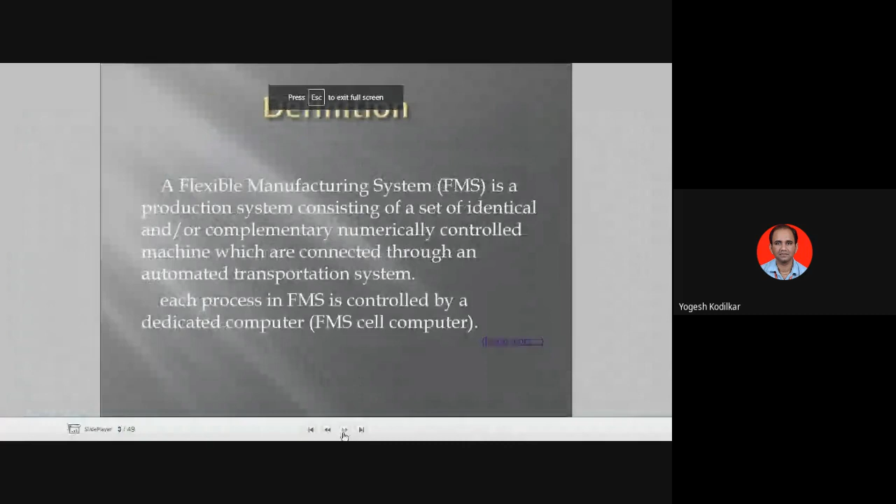That is flexible manufacturing system. FMS काय आपण थोडक्यात बघू. FMS it is a production system, consisting of a set of identical and or complementary numerical control machine. बरोबर, FMS मध्ये काय, इट इज प्रोडक्शन सिस्टीम, बेसिकली काय प्रोडक्शन सिस्टीम आहे ती. त्याच्यात काय काय असतं, सेट ऑफ आयडेंटिकल और कॉम्प्लिमेंटरी न्यूमेरिकल कंट्रोल मशीन.

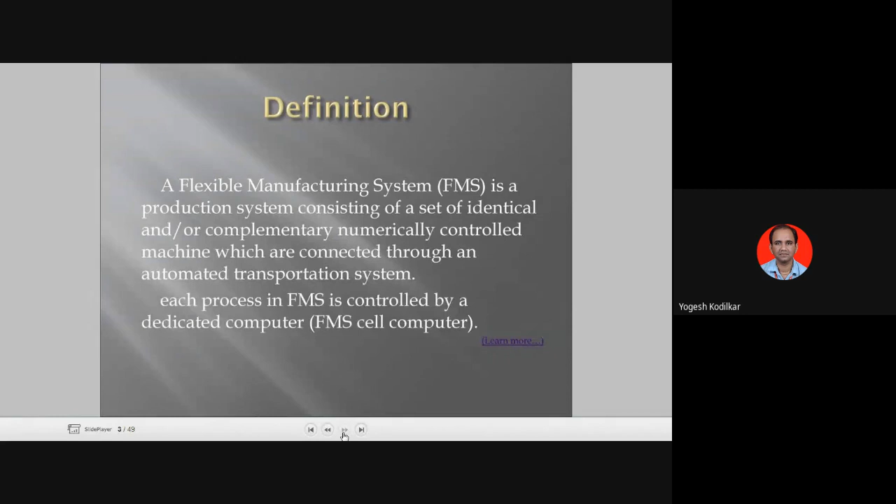NC मशीनच्या बघितलं आपण ना, ज्या नंबर्सनी कंट्रोल होतात. Numbers machines which are controlled by only numbers and letters, दॅट इज न्यूमेरिकल कंट्रोल मशीन. मग न्यूमेरिकल कंट्रोल मशीन्स विच आर कनेक्टेड थ्रू अन ऑटोमेटेड ट्रान्सपोर्टेशन सिस्टीम. आणि ह्या NC मशीन्स काय दे आर कनेक्टेड बाय सम ट्रान्सपोर्टेशन ऑल्सो, म्हणजे एका मशीनवर प्रोसेसिंग झाल्यानंतर that product is transferred to the next workstation, next machine for further processing. So automated transportation system is also there.

Each process in FMS is controlled by a dedicated computer called as FMS cell computer. So that is flexible manufacturing system, it is the production system consisting of a set of identical or complementary numerical control systems. सारख्या सिस्टम असणार आहे, सारख्या NC मशीन्स आहे काही. Not only NC machines, but machines are connected through an automated transportation system also, for transporting from one machine to other machine. ओके. सो दॅट इज युअर FMS सिस्टीम.

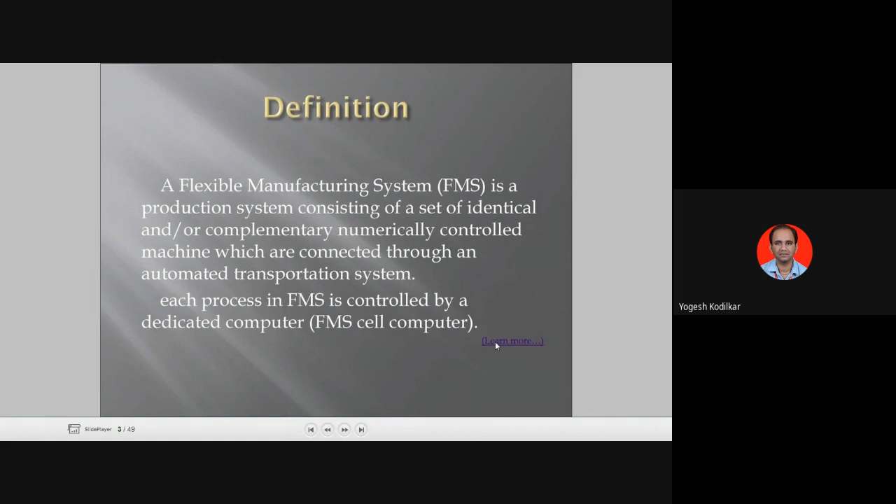बरं. आता हिस्ट्रीमध्ये बघू आपण. हिस्ट्री ऑफ FMS. ॲट द टर्न ऑफ द सेंचुरी FMS डिड नॉट एक्झिस्ट. बरोबर, 20व्या शतकात काय होतं, FMS सिस्टीम नव्हती, 21व्या शतकानंतर सुरू झाली. देर वॉज नॉट अ बिग इनफ नीड फॉर एफिशियन्सी बिकॉज द मार्केट्स वेर नॅशनल अँड देर वॉज नो फॉरेन कॉम्पिटिशन. और मुक्त अर्थव्यवस्था नव्हती तेव्हा 20व्या शतकात.

20व्या शतकात मॅन्युफॅक्चरर्स कुड टेल द कन्झ्युमर्स व्हॉट टू बाय. Henry Ford is quoted as saying, people can order any color of car as long as it is black. This was the thinking of many big manufacturers at the time. After the Second World War, a new era in manufacturing was to come, the discovery of new material and production techniques increased quality and productivity.

This was the thinking of many big manufacturers at the time. After the Second World War, a new era of manufacturing has come. The discovery of new material and production techniques increased quality and productivity. The wars end, open foreign markets and new competition. Now the market focus on consumer and not the manufacturer. बरोबर, कालांतराने काय आलं, दुसऱ्या महायुद्धानंतर हळूहळू कंपनीचा फोकस मार्केटवर नसून दॅट इज गोज ऑन टू द कंझ्युमर. कंझ्युमरला काय पाहिजे त्याची अपेक्षा पूर्ण केली गेली.

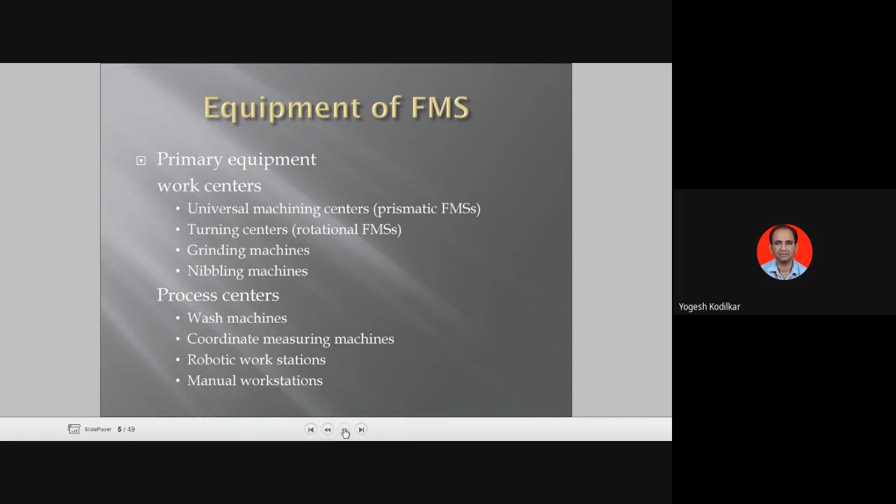FMS primary equipment includes work centers, usually universal machining centers or turning centers like rotational FMS, grinding machines, nibbling machines. These are the work centers for primary equipment. Then process centers include wash machines, coordinate measuring machines, robotic workstations, measuring workstations, or manual workstations. So these are the primary equipment and process centers for the FMS system.

Then there is secondary equipment as well, like support stations such as pallets, fixture load, unload stations, and tool commissioning setting area.

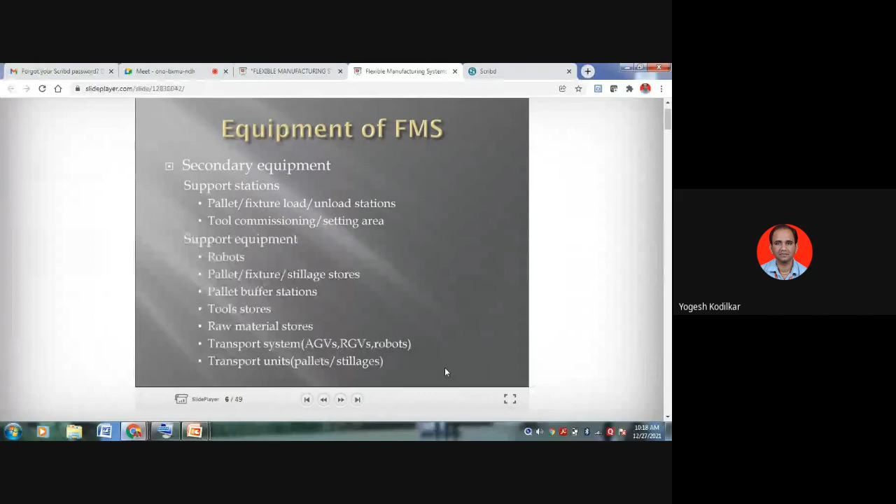Robots, then transport units, pallets and stillages. So these are the different equipment of FMS.

Then these are the applications of FMS, where we can use this FMS system for metal cutting, machining. For metal cutting and machining, we can use the FMS system. In metal forming too, we can use machining, FMS system.

We can use FMS system for assembly, in automobile assembly also we are using this FMS system. Then even joining and welding, arc welding, spot welding, we can also use this FMS system.

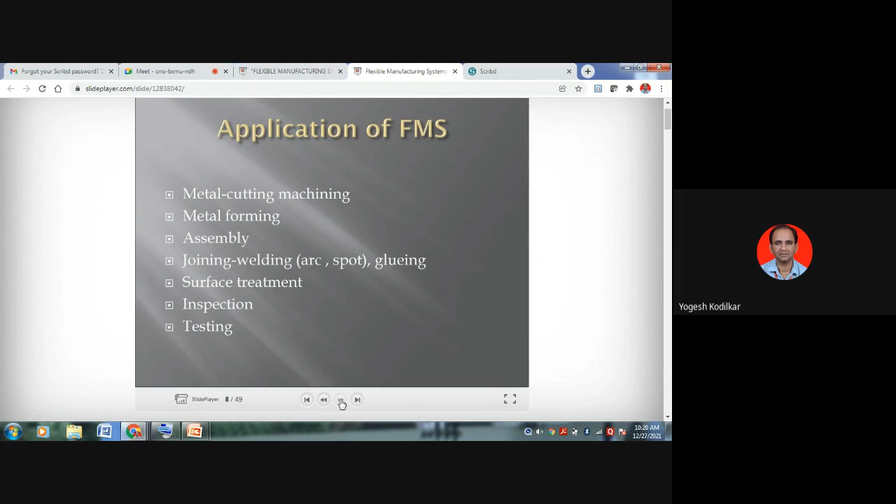Then gluing for pasting, we are also using this FMS system. Then surface treatment, there are some surface treatments like annealing, normalizing, so surface treatment also uses this FMS system. Then inspection for quality checking, we are using this FMS system, or testing, for testing also we are using this FMS system.

Now FMS has different approaches. There are different approaches for FMS, like the capability of producing different parts without major retooling for a number of parts. Without using major retooling, I can go for FMS system.

A measure of how fast the company converts its processes from making an old line of products to produce a new product. From that old line, I need to create something new - I need to take a new approach, like the FMS system.

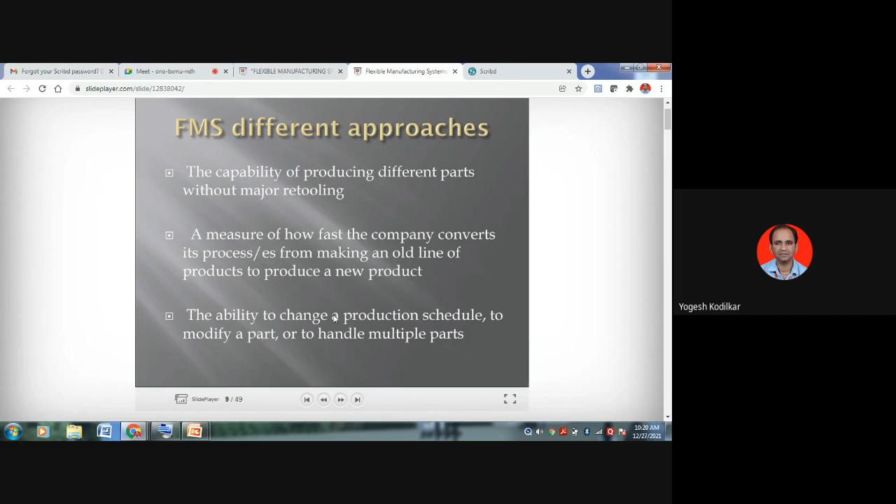The ability to change the production schedule to modify a part or to handle multiple parts, that is FMS system.

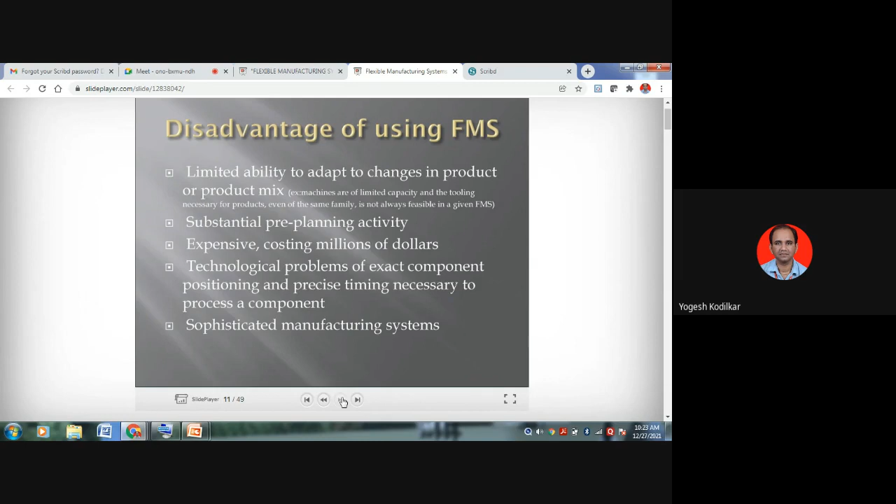Now, what are the developments of the FMS? Several actions must be decided on or before you can have an FMS.

These actions include selecting operations needed to make the product, putting the operations in a logical order, selecting equipment to make the product, arranging the equipment for efficient use, designing special devices to help build the product, developing ways to control product quality, and testing the manufacturing system also.

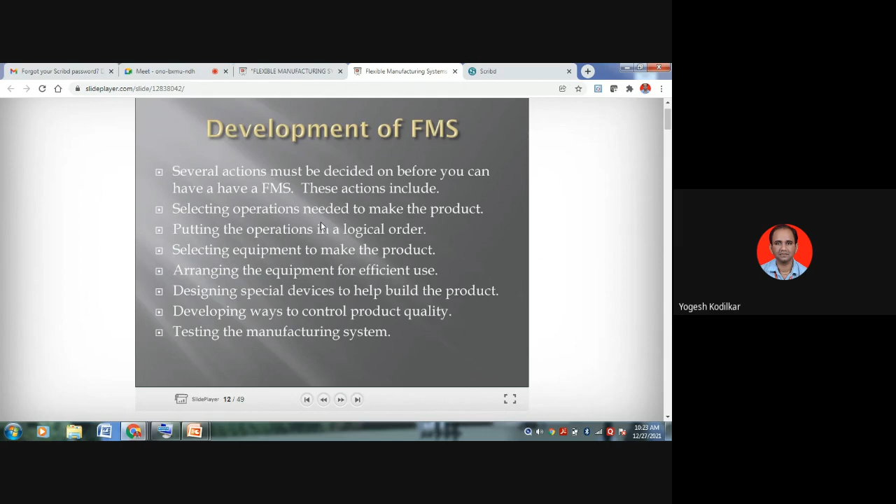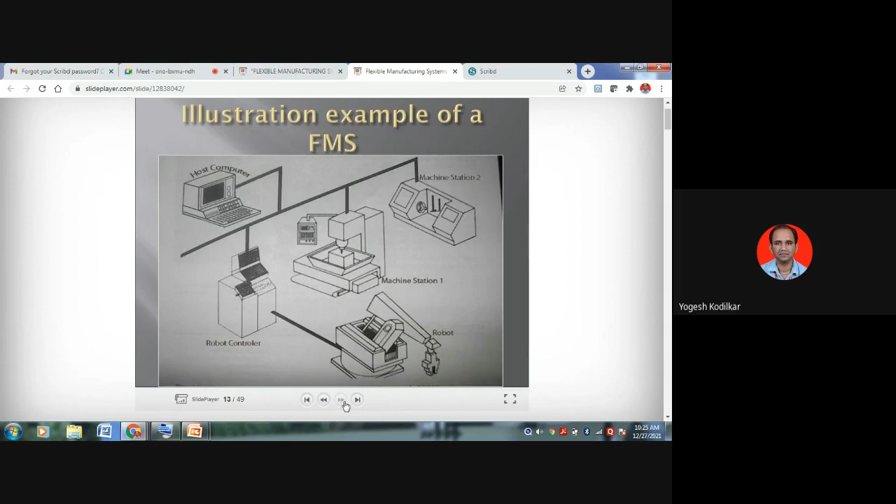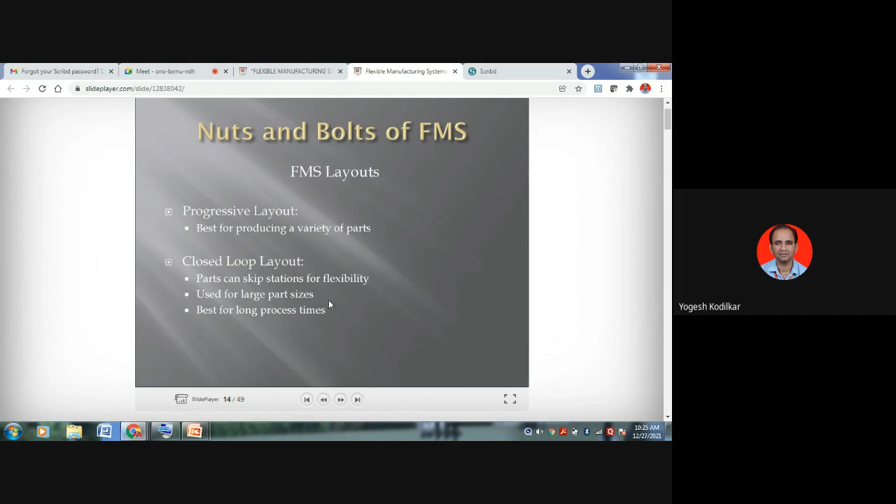So that is your FMS, one simple example of a flexible manufacturing system. Now, FMS layout - there are two types of layout in the FMS system. Nut bolt FMS, suppose progressive layout, best for producing a variety of parts. And closed loop layout - parts can skip stations for flexibility, used for large part size and best for long process times.

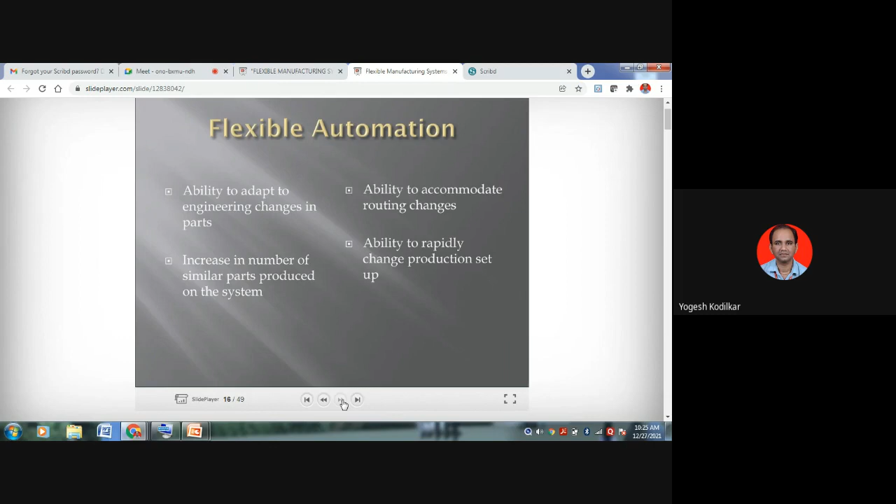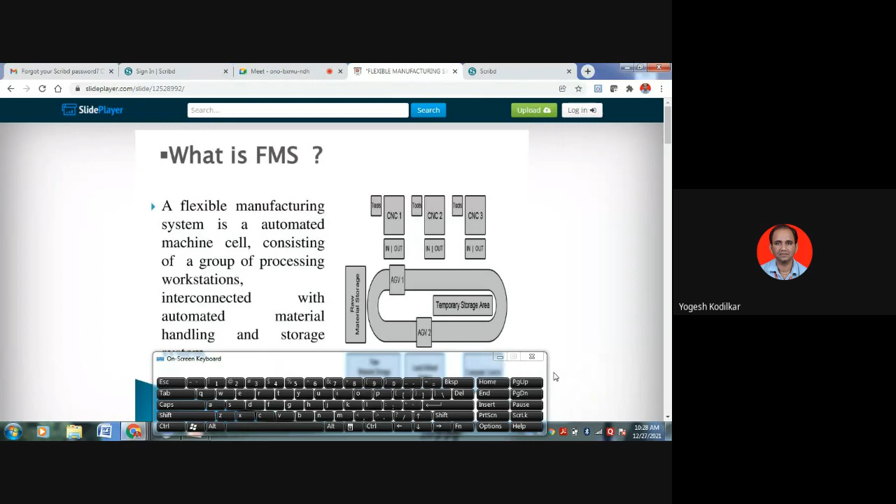So this is the basic introduction and history of FMS.

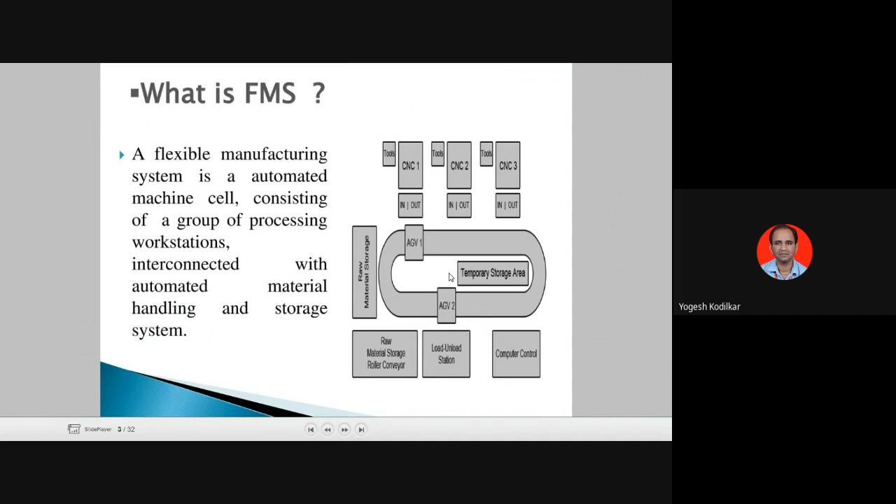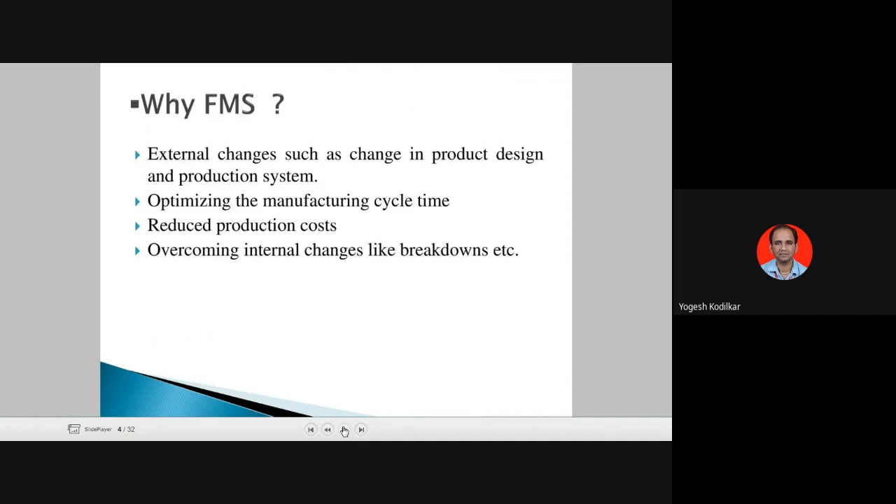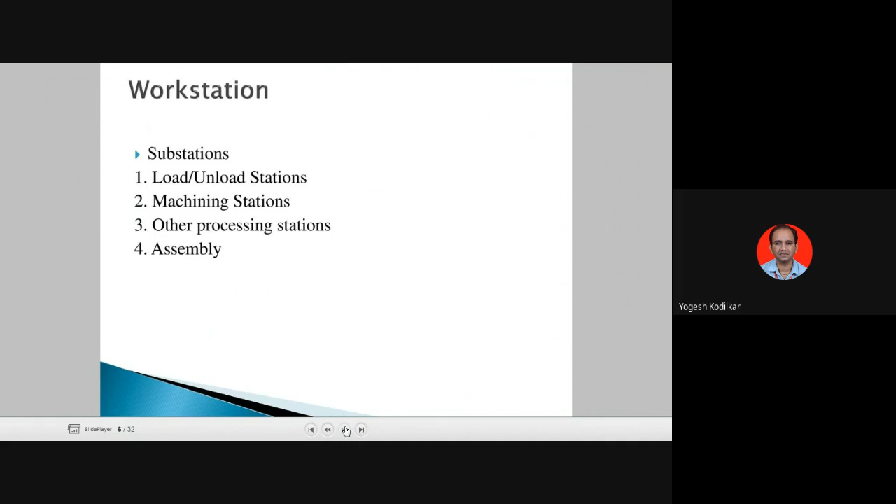These are the basic components of the FMS system: workstations, automated material handling and storage systems, and computer control systems. So these are the three systems of FMS. Now substations: load and unload station, machining station, other processing stations, and assembly.

This is called the AGV, automated guided vehicle. The automated guided vehicle follows an already predefined path. Along this predefined path, the guided vehicles move from one station to another. They are called automated guided vehicles because there is no human intervention—a manless driver, moving along predetermined paths. That is AGV, or automatic guided vehicles.

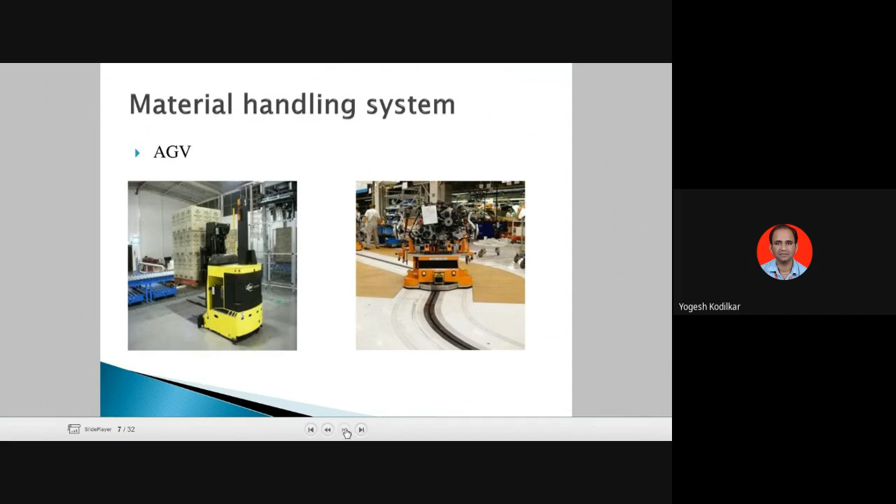Computer control, programmable logic controller.

So this is the Allied Signal's Flexible Manufacturing System. These are the machining centers—machining center 1, 2, 3, 4, 5, 6, 7. These are the number of workstations. Then these automated guided vehicles are also there on this predetermined path. These AGVs are moving, and there is a coordinate measuring machine also there. The CMM machine is for measuring the coordinates. Then there is also a storage station. After processing the component, it is stored at this storage system.

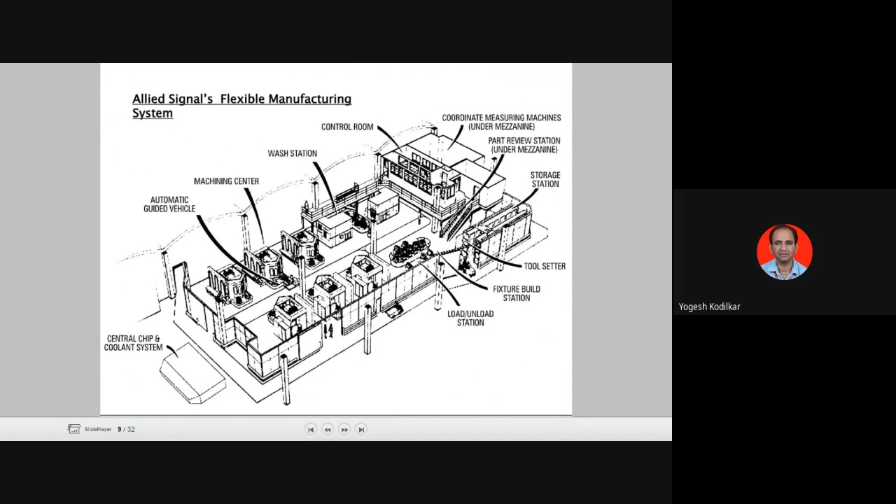So this is your automated system. With the help of this automated guided vehicle, material can transfer from one workstation to another station. So this is your schematic diagram of the flexible manufacturing system. This is one example of an FMS system, flexible manufacturing system.

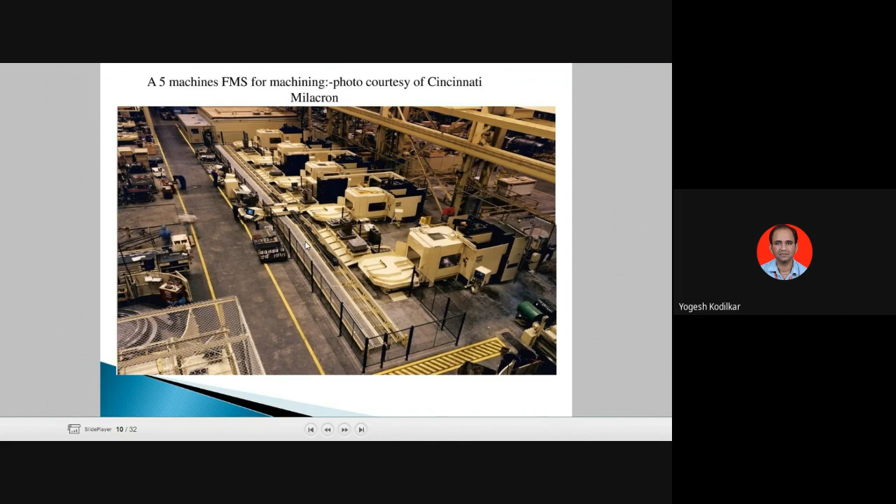Again, a 5-machine FMS for machining, photo courtesy of Cincinnati Milacron. These are machine 1, 2, 3, 4, and 5. The 5 machines are interconnected together with the help of the automated guided vehicle. That is a flexible manufacturing system.

So these are the types of FMS: sequential FMS, random FMS, dedicated FMS, and engineering FMS.

Now, the layout of FMS: progressive or line type, loop type, ladder type, and open field or robot centered. These are the number of progressive layouts. In the progressive layout, there is a progression after machine 1, machine 2, machine 3. Then there is a loop—circular or rectangular loop. This is called a loop layout.

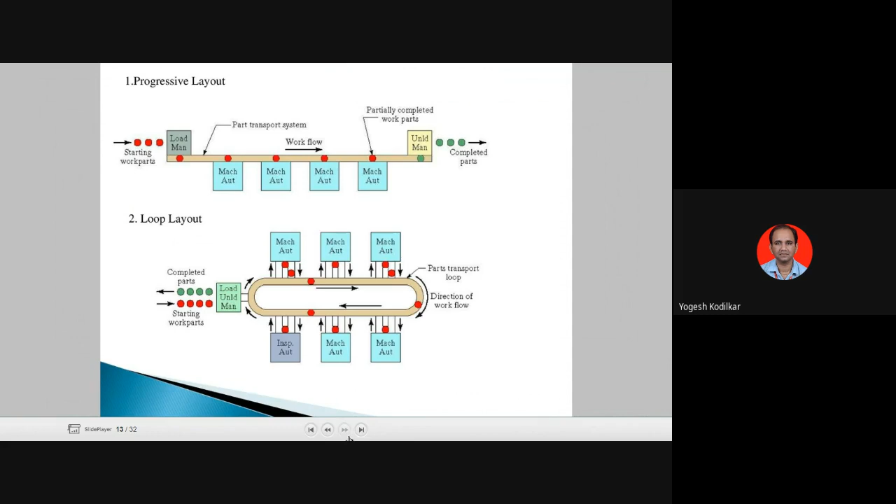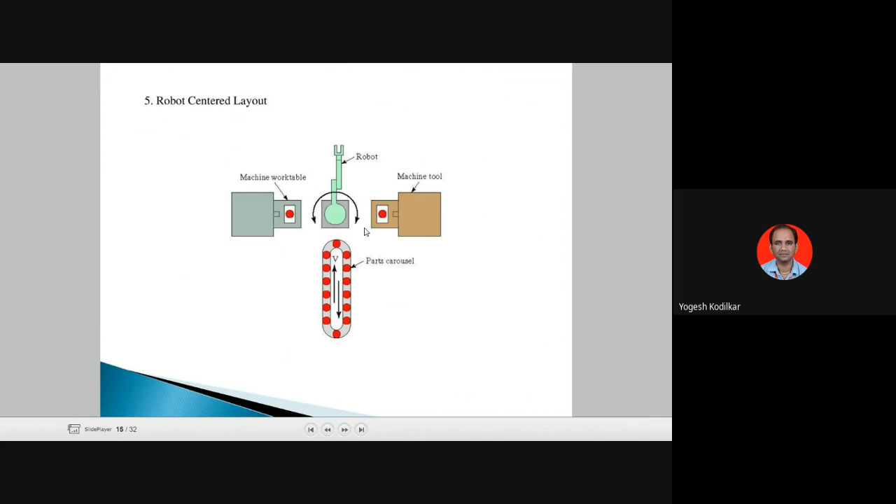Ladder, meaning from first step to second step, there is the ladder type layout, then the open field layout. Then open fields are there for layout. Robot-centered layout, where the robot is at the center. These are the different layouts for the FMS system.

Flexibility in FMS, flexible manufacturing, means the ability to deal with slightly or greatly mixed parts, allowing variation in parts assembly and variations in process sequence. This means that in the flexible manufacturing system, when one machine's component moves to another machine, it is not like the FMS system is working on only one part. The FMS system can handle different flexible parts.

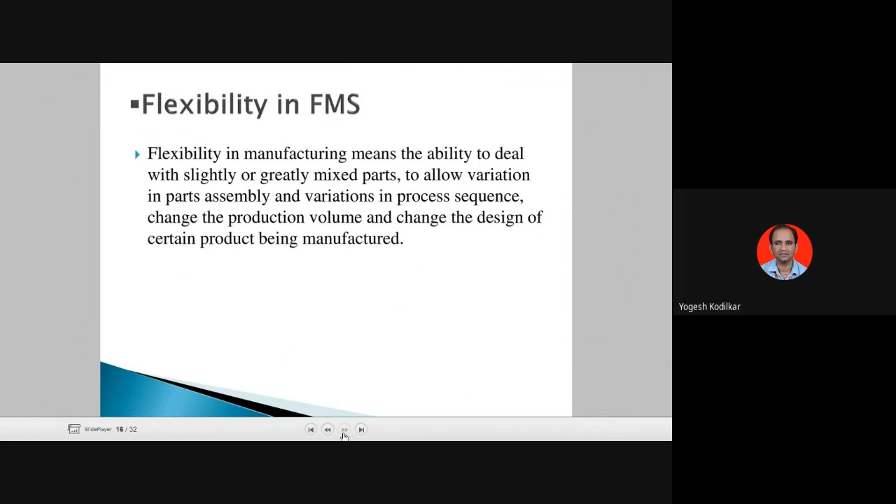This means there can be a change in product design or a change in production system design. This design change can be easily incorporated or adapted into the FMS system. That is the meaning of flexibility—that's why it is called the flexible manufacturing system.

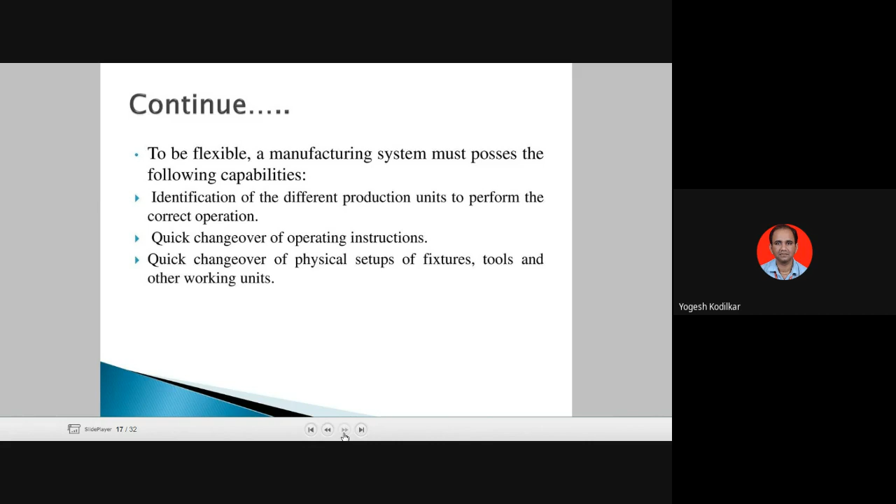To be flexible, a manufacturing system must possess the following capabilities: identification of different production units to perform the correct operation, quick changeover of operating instructions, and quick changeover of physical setups of fixtures, tools, and other working units. That is the flexibility we require.

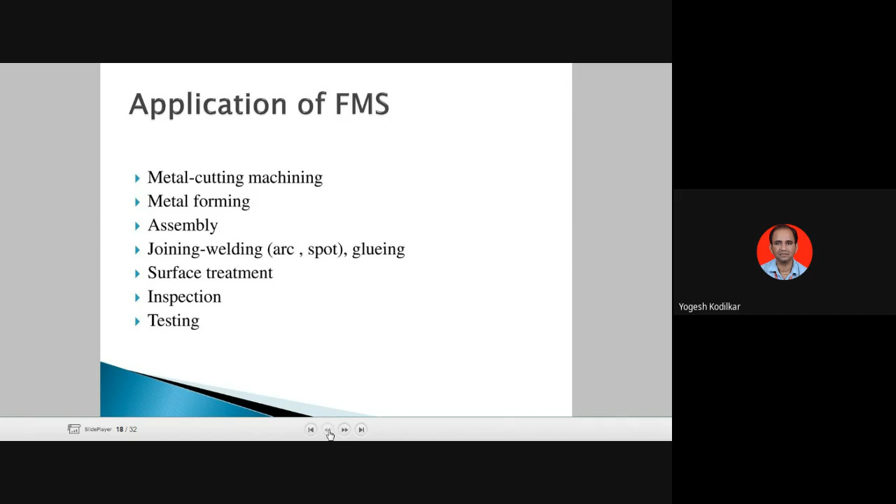And these are the applications: metal cutting, metal forming, assembly, joining, welding, gluing, surface treatment, inspection, and testing. So these are the different FMS systems for different applications.

So in this way, students, the FMS system is one of the important parts for any advanced company in automation. If we want flexible product working, your product is not fixed—your product has a variety, changes in product system or changes in production system. Such changes can be easily tolerated and accommodated in this FMS system.

That's why it is called a flexible manufacturing system. There is also automated material handling—these AGVs, humanless driving systems, which run on a predefined path. Along this predefined path, the automatic guided vehicles run from one workstation to another. That is the flexible manufacturing system, students. These flexible manufacturing systems are an important part for any system.